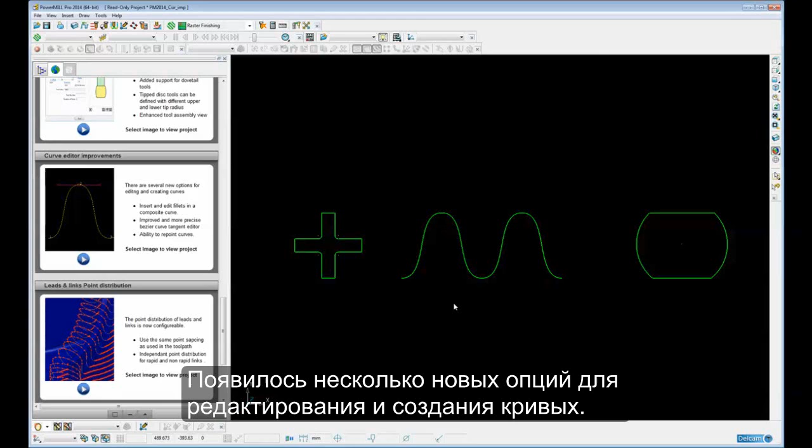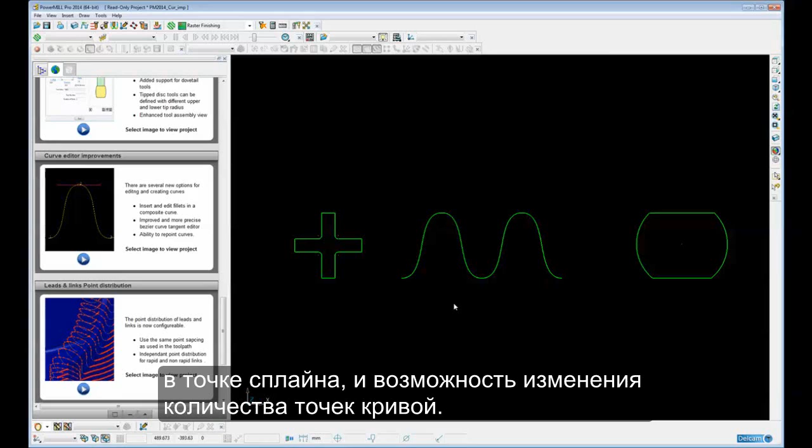There are several new options for editing and creating curves. These include the ability to quickly insert and edit multiple fillets within a composite curve containing lines and arcs, an improved and more accurate method of editing the tangency and magnitude of points within a Bezier curve, and finally the ability to repoint curves. So let's have a look at these new functions in a little bit more detail.

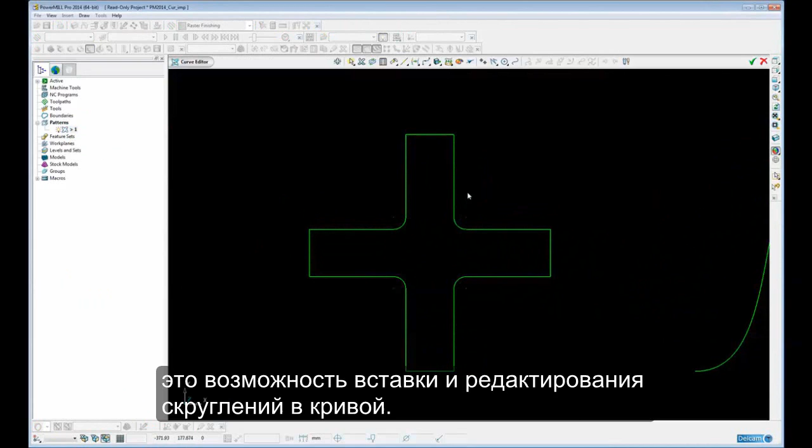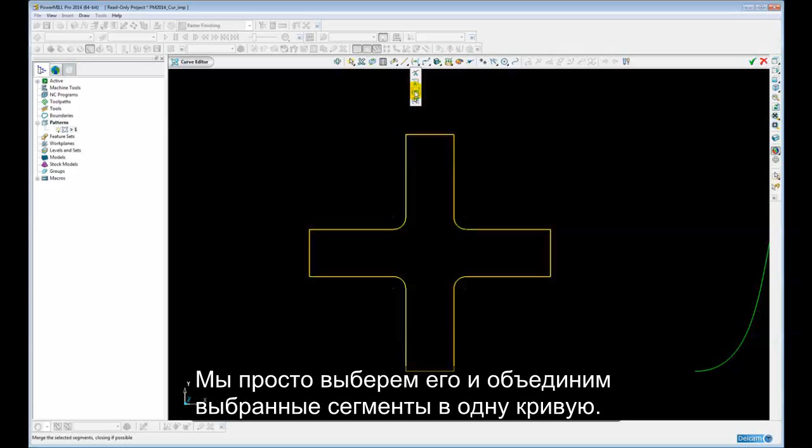So here we have on the screen a single pattern with multiple segments. So I'm going to go into the curve editor, and the first new function we're going to look at within the curve editor is the ability to insert and edit fillets within a composite curve. Now at the moment, this what appears to be a closed profile is actually made up of a series of individual lines and arcs. So before we can actually insert and edit fillets, we need to convert this into a composite curve. So we simply select it and merge the selected segments into a single curve, and this is a single curve made up of arcs and lines.

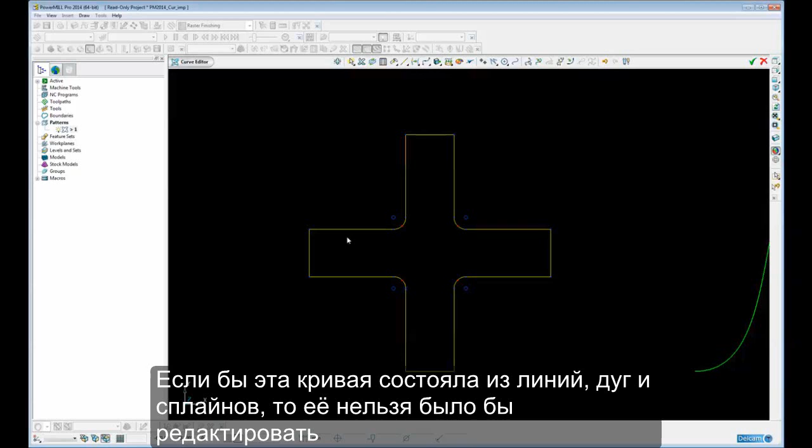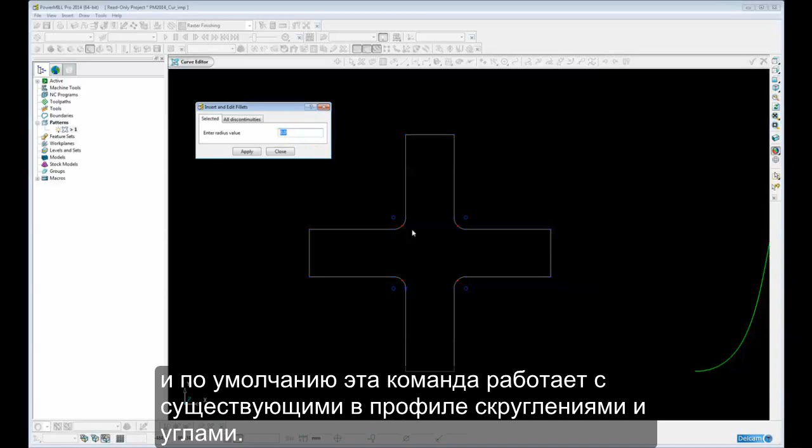So now when we select the curve, you can see the insert and edit fillets command becomes available. If this curve contained lines, arcs and maybe Bezier spans, then this would not be editable using the insert and edit fillets command. But because it only contains lines and arcs, we can come into insert and edit fillets, and by default the command works on existing fillets within the profile and discontinuities.

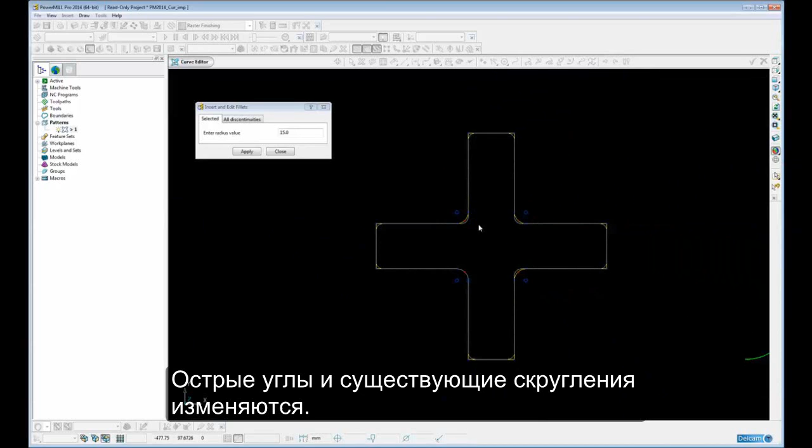So if I change this to say 15, you will notice that all discontinuities have been filleted, plus the existing radius fillets have been modified to 15. Okay, so sharp corners and existing fillets are modified. If I want to keep the original radiuses within the curve, then I simply select the discontinuities option, and only the sharp corners will be filleted. Let's just change that to say 30.

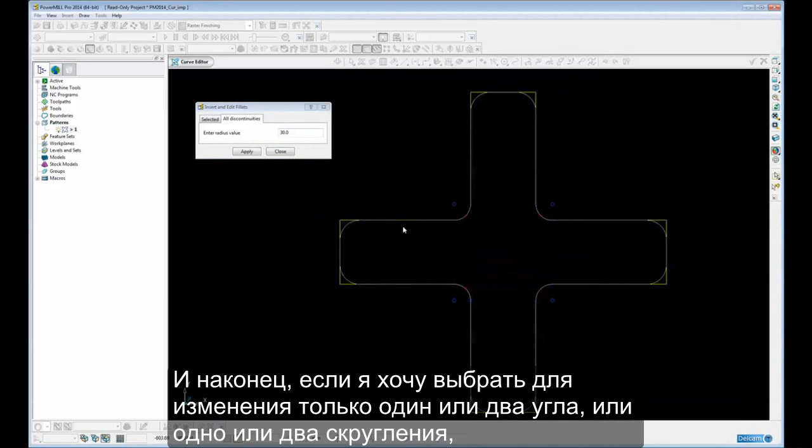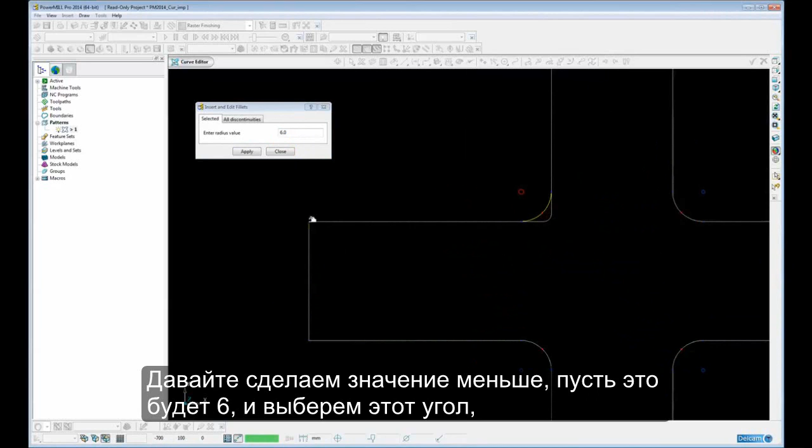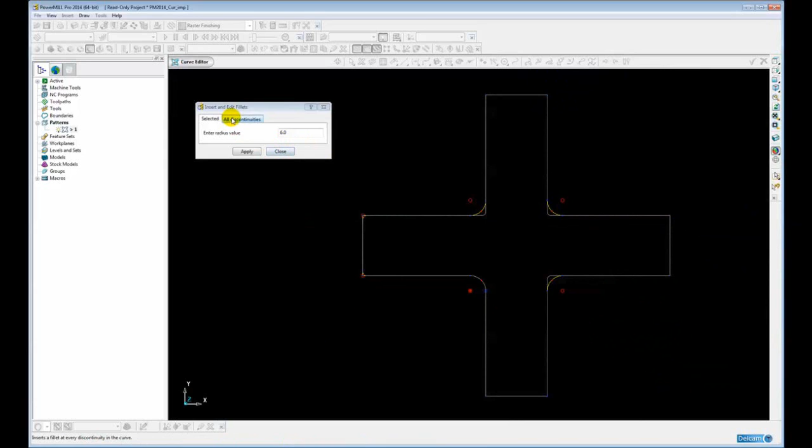And finally, if I only want to choose one or two corners or one or two fillets to modify, then I simply go back to selected and just click on whichever corner I want, including sharp corners and fillets. Let's make that smaller so we can see it. Let's make that 6, and select this one, maybe make that 8, or that one, and I can hold down the shift key and select as many as I want, like so. Let's change that back to all discontinuities and just finish off by putting a 40mm radius, and then apply and close. Okay, so that's the first of the new functions.

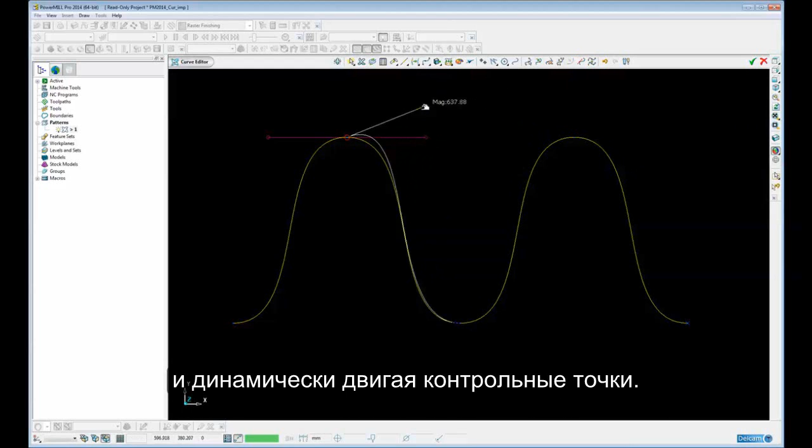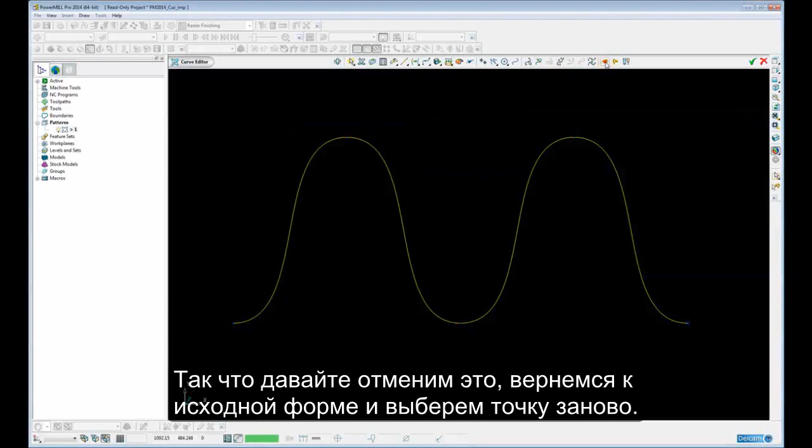The second new function within the curve editor is the improved Bezier tangent editor. So this works on the points within a Bezier curve. So if I select a point, you can see that the option becomes available, edit the tangents. In previous versions of PowerMill, we could edit the tangents by graphically dragging and dynamically moving the control points. However, this was not an accurate, precise way of editing the tangent and magnitude. So let's undo that and get back to the original shape and select the point again.

Now we have a form very similar to the form that you will see in PowerShape, where we can edit the tangent before and after the point, and also the magnitude before and after the point. So for example, we can simply scale the magnitude if we wanted to, or specify a specific scale such as 2, so double the magnitude, and then we'll just set that back to 1.

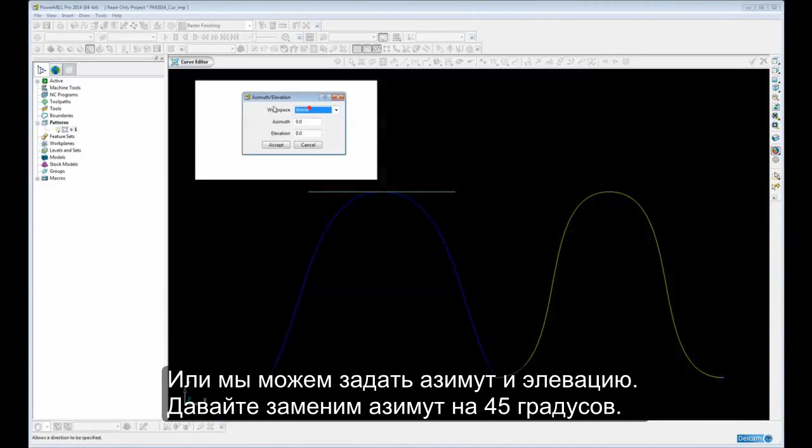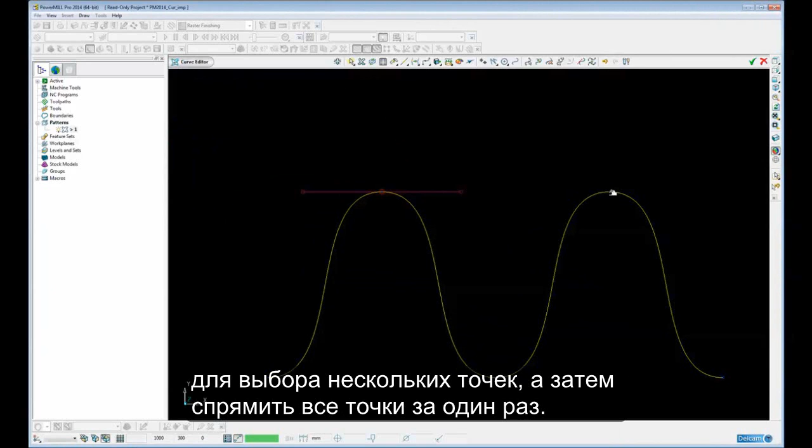Likewise with the actual tangency direction, we can use one of several options. We can straighten the tangency, for example. Let's just free that back again. Or we can specify an azimuth and elevation. Let's change the azimuth to 45 degrees, for example. Let's just cancel that. Or even specify an IJK value based upon a workspace. If we want to do more than one point at the same time, we can do that by simply shift selecting multiple points, and then we can straighten all those points in one go. So that's the improved tangency editor.

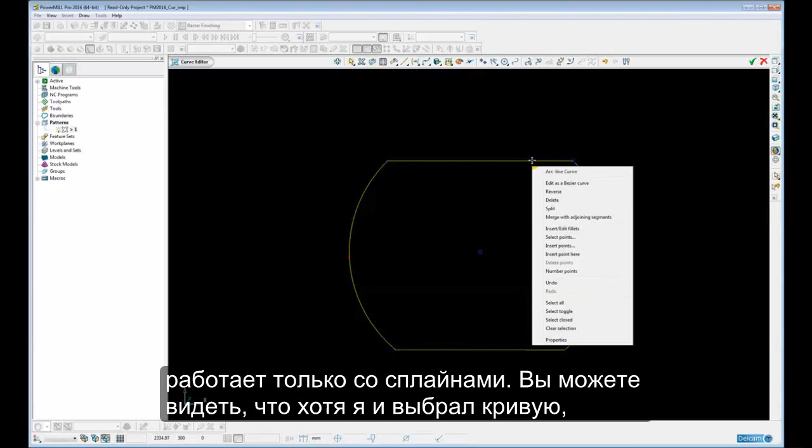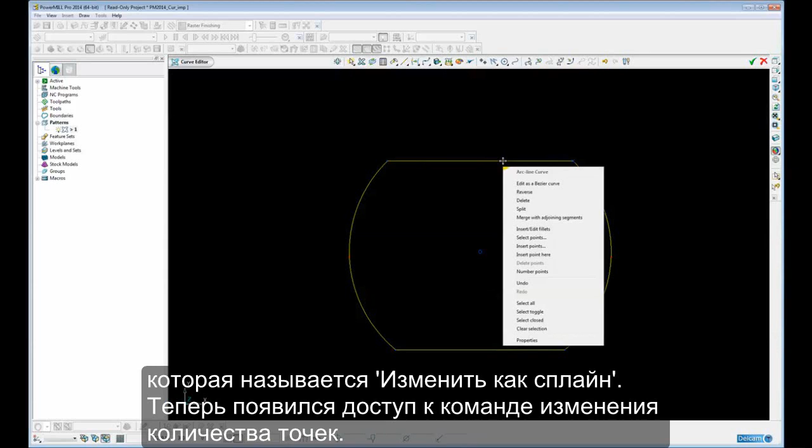The final new function within the curve editor we're going to look at is the Repoint Curve option. At the moment, this curve is defined as a series of lines and arcs. Now the Repoint Curve function only works on Bezier curves, so you can see even though I've selected the curve, the Repoint Curve function is greyed out. If I wanted to edit the points in this curve, I would have to convert it into a Bezier curve or edit it as a Bezier curve. There is a new option when we right click on the segment that says edit as Bezier curve. Now I have access to the repoint command.

So you can see the default number of points is 6, so it's actually repointed the curve to have 6 points, and because by default it doesn't maintain discontinuities, you can see the shape has changed quite dramatically. If I click on this option to select discontinuities, it will automatically find all the discontinuities and make sure those points are kept, and it will repoint in between. So obviously there's still not enough points to hold the shape, so let's increase that to say 20, tab, and that gives me a much more accurate comparison to the original curve.

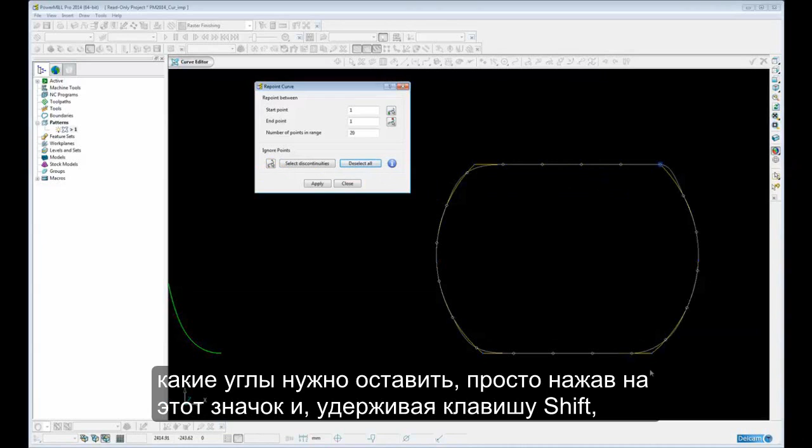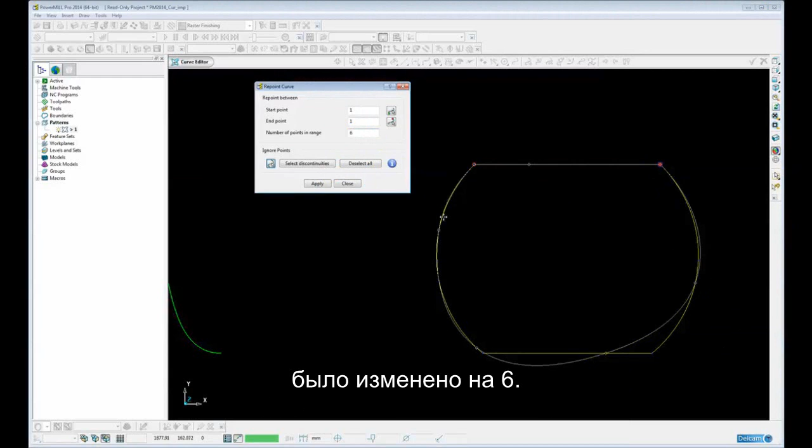If I deselect all the discontinuities again, I can choose individually which discontinuities I wanted to keep simply by clicking on this icon and then holding down the shift key. I can choose maybe just those 2 points and then repoint maybe to 6 again. So you can see those 2 points have been held, and the remainder has been repointed to 6. Let's just deselect all those again.

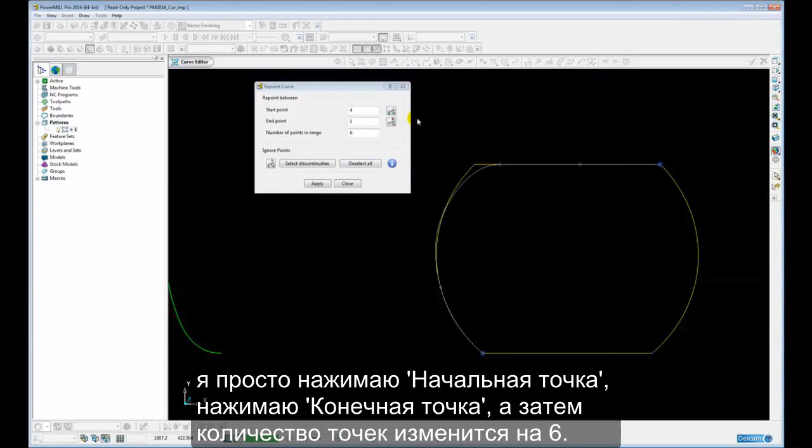I can also repoint in between 2 points. So for example, if I wanted to just repoint between this point at the top here and this one at the bottom, then I simply click the start point and click the end point, and then that will be repointed to 6. Let's make that 12, for example. Let's apply that and close and finish.